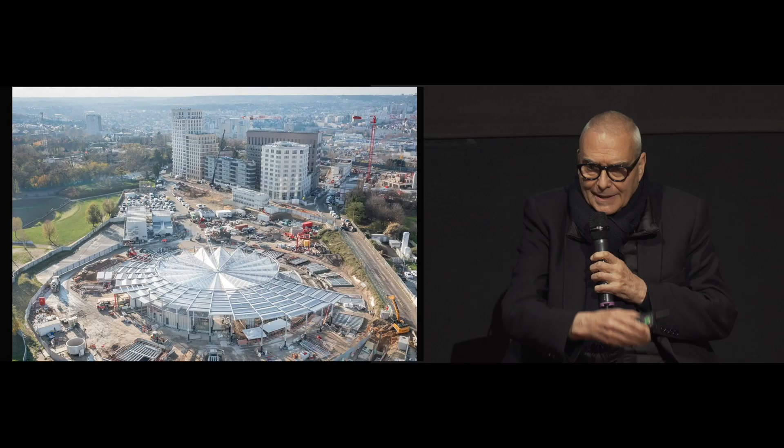And indeed, it will help connect the Gustave Roussy Hospital, which is one of the largest oncology centers in Europe. With this train station, the idea is to extend the city towards the subsurface.

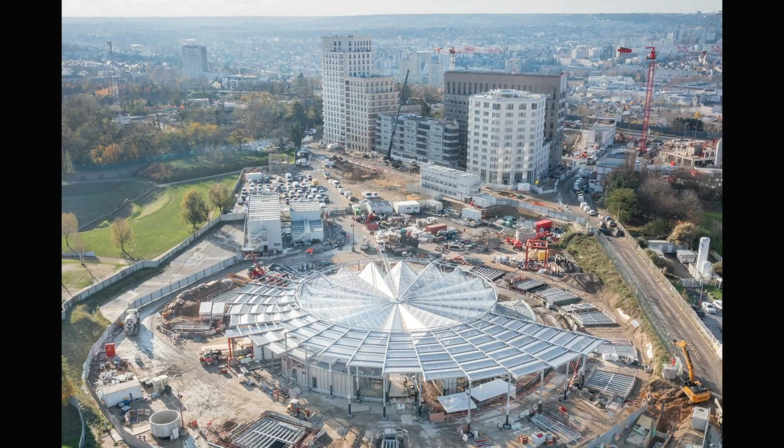We've spoken a lot about subsurface, about underground networks today, and you really want to create that connection between what's happening underground and over the surface. This station is not monumental in its visible part, but more monumental in its underground section.

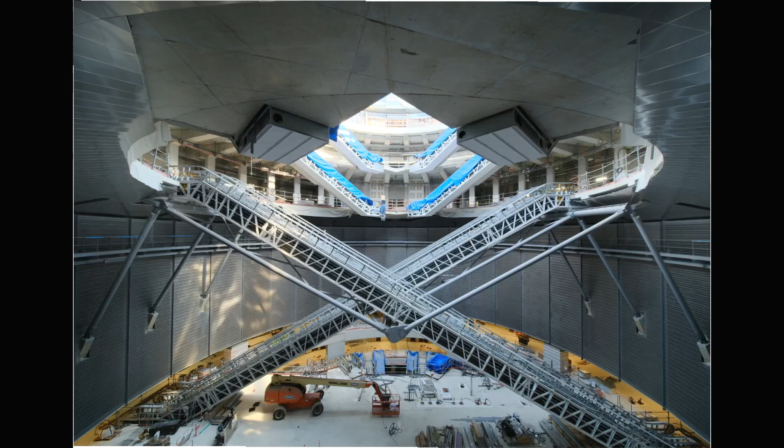Natural light will enter that part that's underground, and when people get off their metro, right above their heads, they'll see natural light shining through. So the idea again is to extend cities underground.

We've spoken about public spaces, and really this is a place which will be for the common good. So the principle is for that train station to start quite far down. With the first two levels, there will be services, stores, and outlets, and the Gustave Roussy Hospital will also be extended underground with a connection to that train station.

This is a very interesting train station. We've spoken about infrastructures in various ways and about architecture as well, with the dimension of infrastructure and engineering — we used it as a language. House of cards, etc. But if we can say, in a very direct relationship, here the idea is to have that direct relationship with the work that was imagined by engineering.

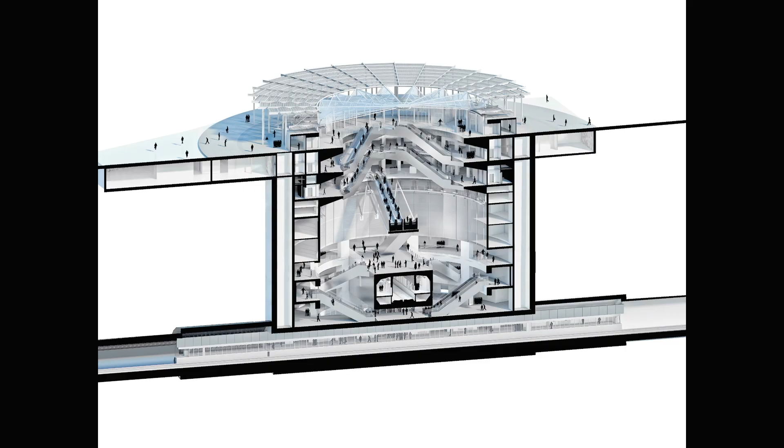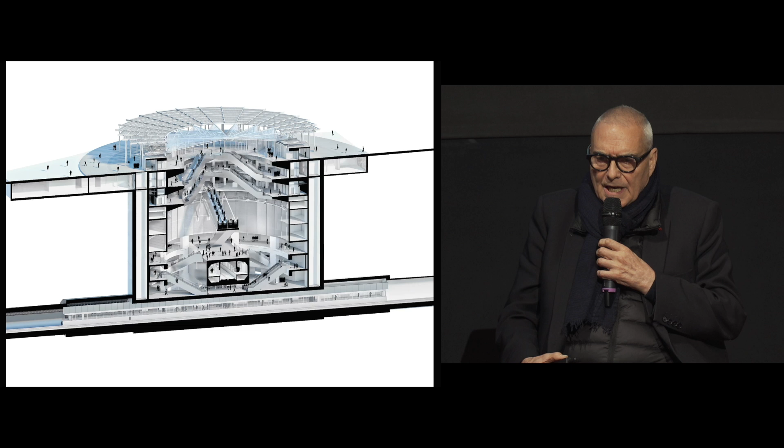My proposal back in the day, when we were applying during interviews, was to develop that cylinder shape. This is a 70-meter diameter station that goes 50 meters down, and with that cylinder shape you do not use quite as much material. The wall separating the train station from its geophysical environment is just a 1 meter thick wall of concrete. So with these dimensions, the train station will be quite open and will not take up quite so much space.

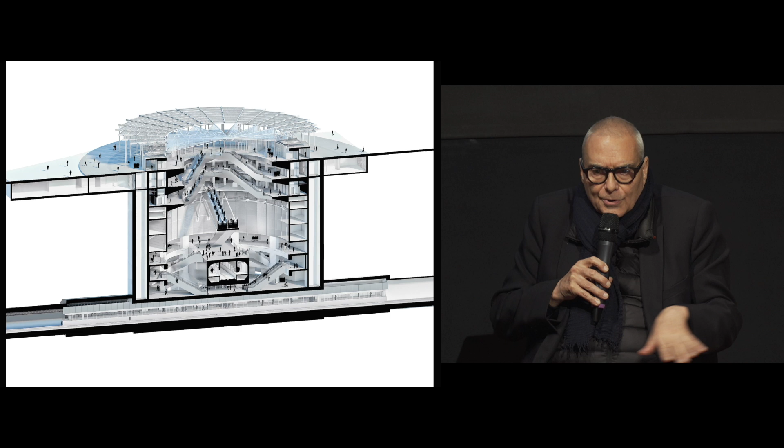And the estimate is that there will be 80,000 passengers going through the station every single day. So this project is an extension of our realization in Napoli with a metro station that was built in front of the train station on the Piazza Garibaldi.

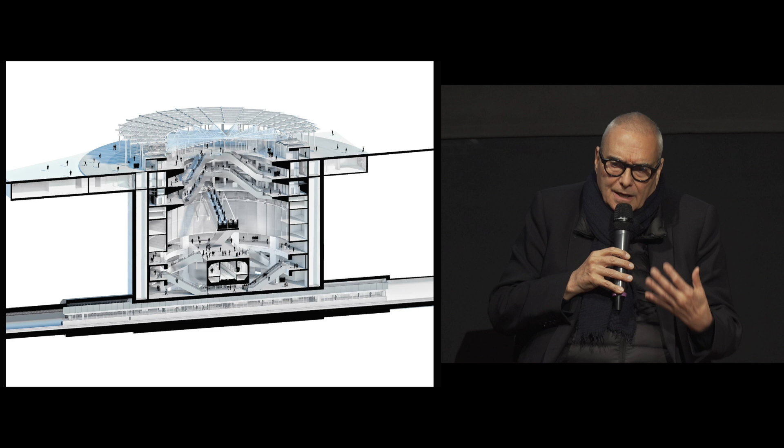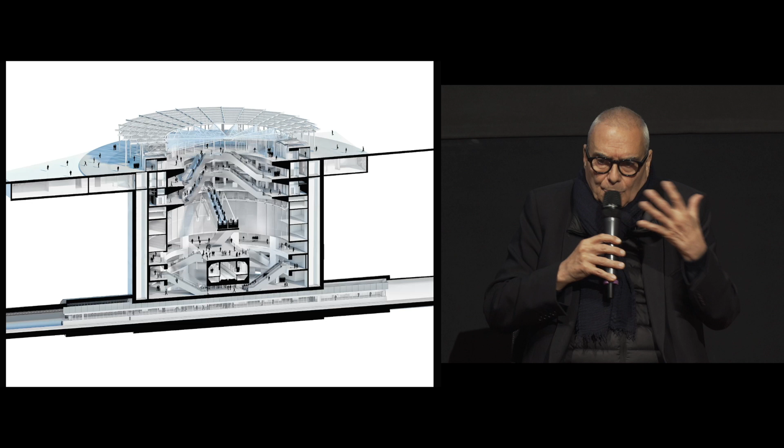Again, the idea was to shed light underground with mechanisms and systems that we implemented in Napoli as well, but in a more Cartesian, scientific way. So here you have a movement that's being staged. We're going underground, no galleries, no tunnels. Light is here with us the whole time. When you get off your metro, you have that natural light shining down on you directly, so you have that natural flow accompanying passengers. The space, the vacuum, is here from a physical standpoint, allowing the air to enter fully in these volumes, and the same applies to light. So there will no longer be any discontinuity between that train station underground and the city above.

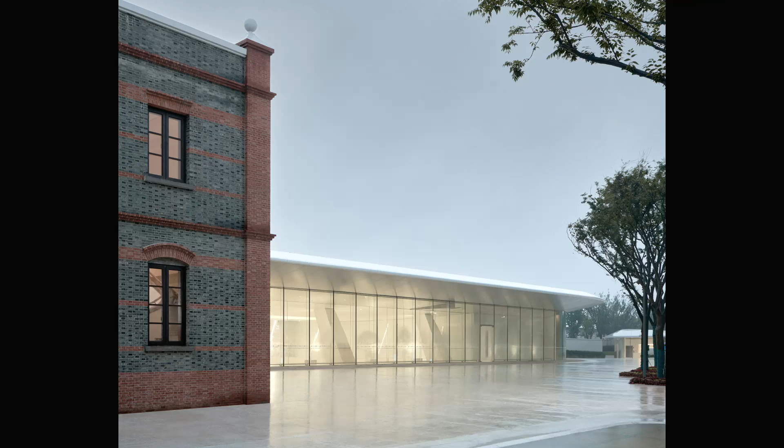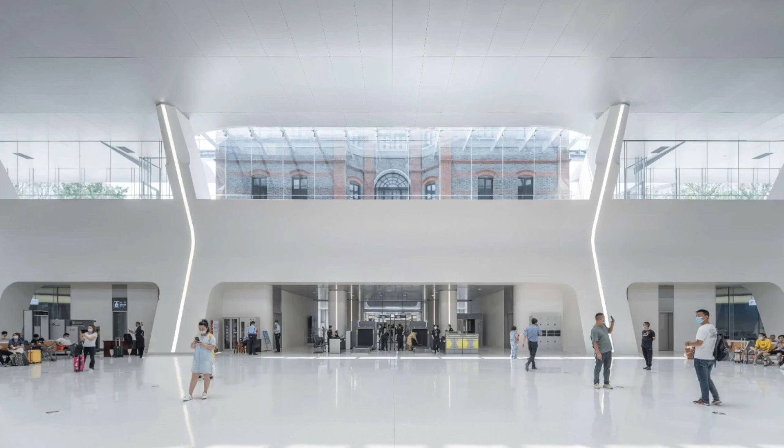That became the excuse: we could make the new train station really low. So we kept the 2-story building, and on 2 sides you see the new building with only 1 floor above ground, with the main function pushed below. We also bring natural light to the underground. We let the public transportation, the parking, everything go underground, so we can keep the ground space open for trees. So that's the space underground with a lot of natural light. You can see the historical building, and there's also a waiting area here.

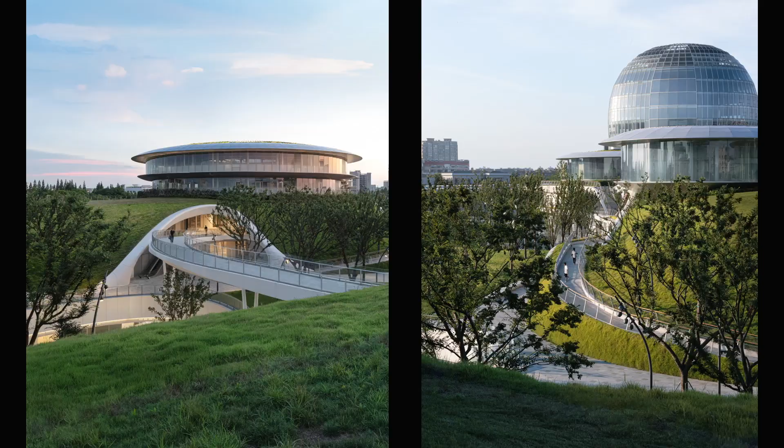Above ground, we introduce a lot of commercial and public functions, but we integrate all this with the park. The idea is that the train station is very functional, but a lot of people come here, and they should go beyond the function—they should find more green space, public space, open space. That was the idea.

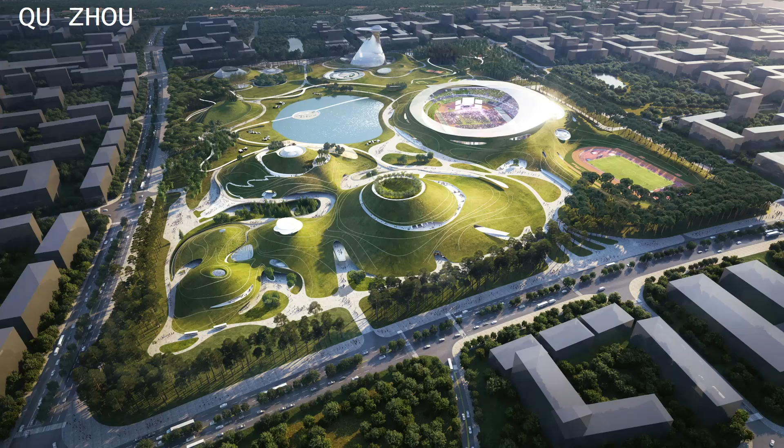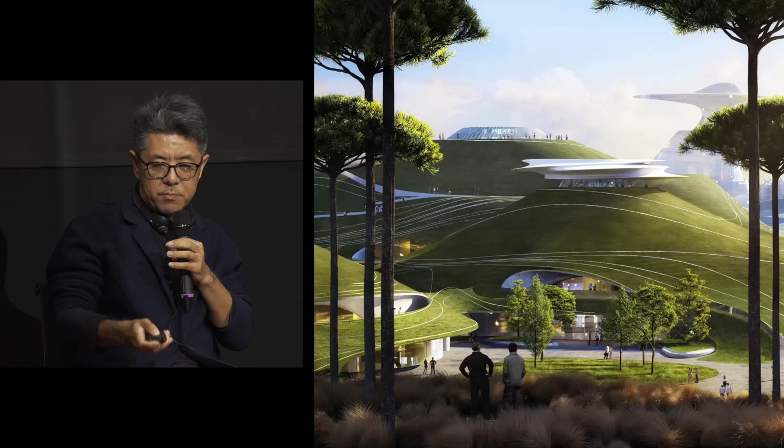This is another train station, but it belongs to a new train station development area, in a city called Quzhou. We were supposed to build several stadiums next to the train station, but here you can see we covered all these train stations and stadiums with green. So the whole area becomes a park, and all this mountain-like structure inside contains the stadiums.

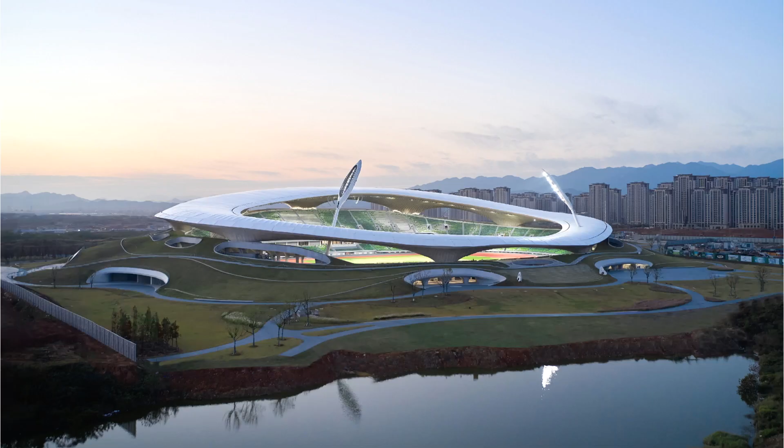They look like volcanoes. It's a big space inside, but outside you can walk around as a park. You can climb those structures—those are artificial mountains, you can just go up there. This is one stadium we've already completed; we're building more, but this one is already finished. It's an open space for sports.

Around it is a public park, but this is next to a train station. So we decided to provide not only the sports function, but also a green park. Here you can see that they're building the train station first, and then building all these cities around, because the transportation can bring a lot of people, and they build residential and commercial around the train station. But here, the stadium becomes the starting point for this new open green space.

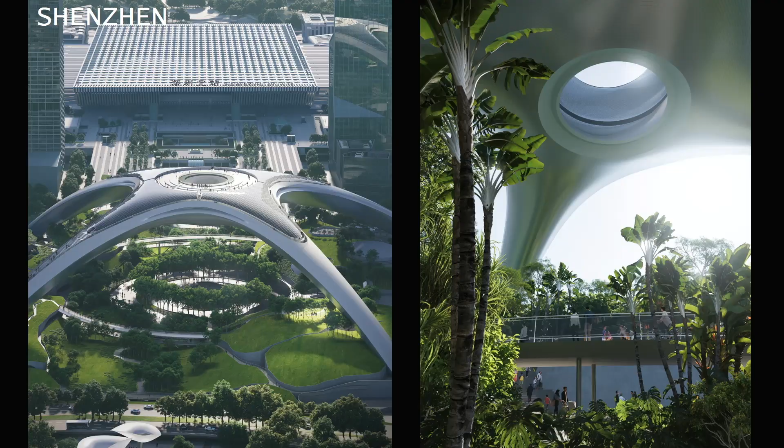We're still designing this, but this is actually in front of a huge train station in Shenzhen. You see that the background is a big station. It's connected to Hong Kong, Shenzhen, and the rest of China.

In front of this there's a space. They want to build more functions, but they didn't exactly know what to do. But here is our proposal: to keep the ground more like an integrated natural function. And then we build this big arch as a space museum. Underneath is a lot of educational function for kids. Actually, they have many towers around.

Every station has towers for office, residential, hotel. But what is lacking here is space for people to stay, and for kids and families to go—because they don't go there, they only go for business. So we figured out how to provide more public space, leisure space, parks, and educational space.

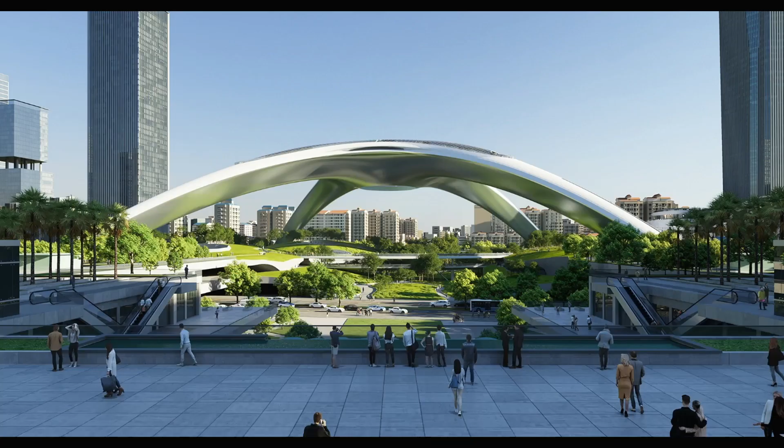So here is one of those kinds of spaces. There's a museum above ground in the sky, and you can go up from the angled lift. Underneath is a green space. Under the green space is the subway, train tracks, everything. That's why the structure has to go to all the corners, because you cannot build anything in the middle.

So we make this almost like a gateway in front of the existing train station. Of course they need a landmark, they need something visual, but more importantly they need something more engaging, more usable as a public attraction. So underneath here you have a park, you have an educational function, and above you can always provide a view deck for everyone to go up.

So I think, from the previous conversation, I really support the idea that functional architecture should also be something beautiful and culturally related, so that everyone can enjoy this journey as part of life.

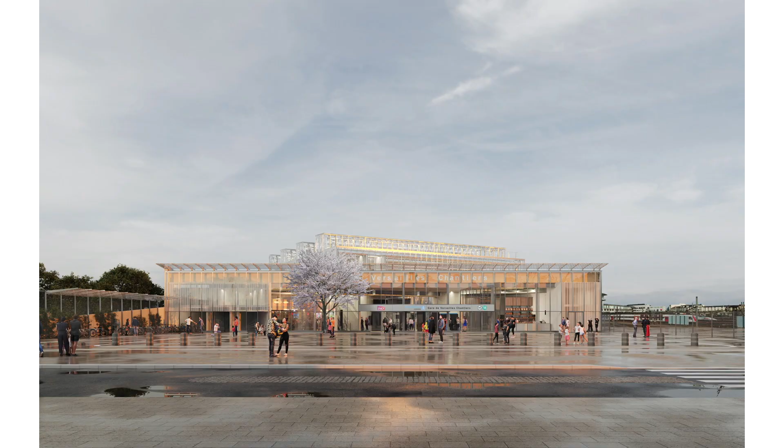Yes, so I'm starting with a very different station here, Versailles Chantiers—so quite a contrast. Here we have an existing station, the Versailles Chantiers station, that already existed, and it was extended with the Grand Paris project, with the metro extension.

We're speaking about infrastructure and architecture in that roundtable, and about the connections between both. Well, these train stations that are underground, that are kind of station boxes, quite inevitable in a way. It's a constraint that you have to make do with, kind of like a machine. And then when you get out...

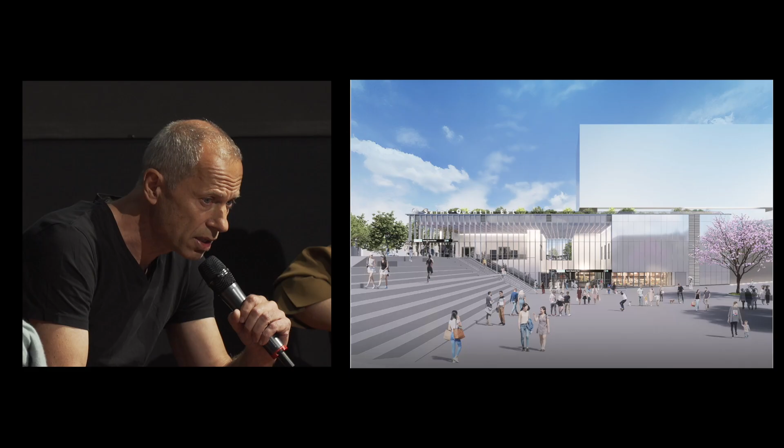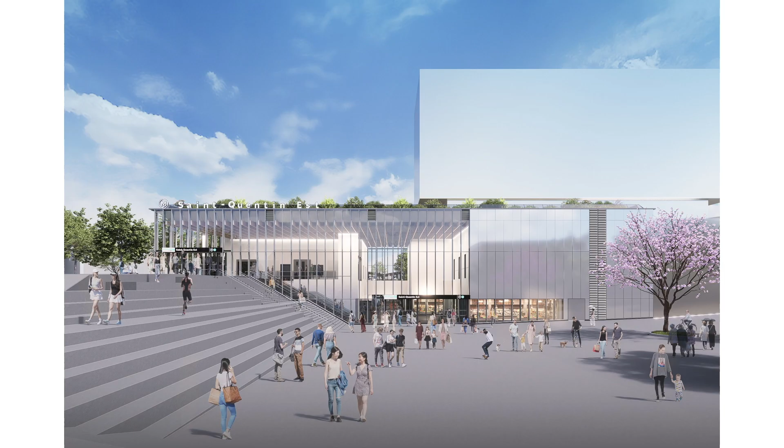When it comes to public spaces, here we're basing ourselves on public space. You have that grand square here, and it's on an intermediate level with the mezzanine, and you have natural light shining through within the station, and you have an underground passage connecting both sides.

Connections are important, and this is a topic which I think is perhaps rather conventional. You've already spoken about the Villepinte station, so I think I'm going to perhaps not focus too much on it. We are in charge of an entire section there, that's 5 kilometers long, above ground.

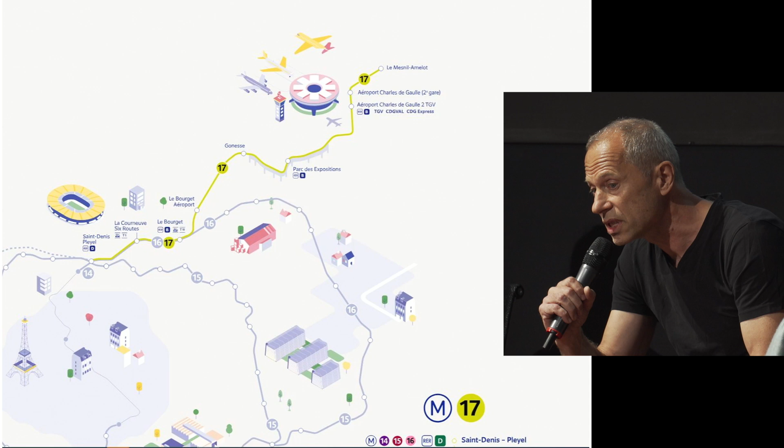As I listened to Aurélie, I thought to myself, well, that's a pity, because there should be indeed more metro lines on the surface. We were so lucky to be able to tell the story of the landscape that we are going through. So it's kind of like a stroll through these existing urban spaces, or urban spaces to be, kind of like a promenade.

You spoke about the Simone de Beauvoir passageway, and here we have a really great example of that, with a connection that was made between the city center areas and other surrounding areas. And with these connections, things can work.

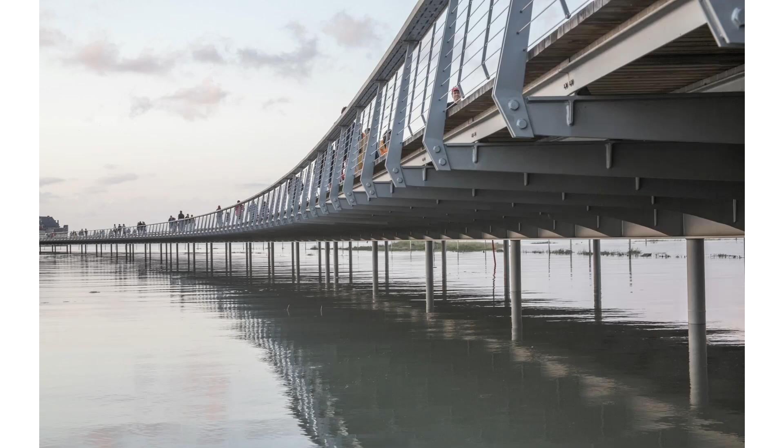Here, that's the access passageway to the Mont Saint-Michel. Why did I want to speak about this project? Well, that's because here you have that intimate connection between the structure and architecture. And what you're seeing here, we planted these poles every 12 meters, which was definitely no easy enterprise with the tides that come and go every 12 hours.

We worked hand in hand with engineering, and with surface metros, that's certainly something that you need to do as well. You really need that connection between engineering and architecture. You really want to work hand in hand. It's really important. Now, very quickly, this is our journey.

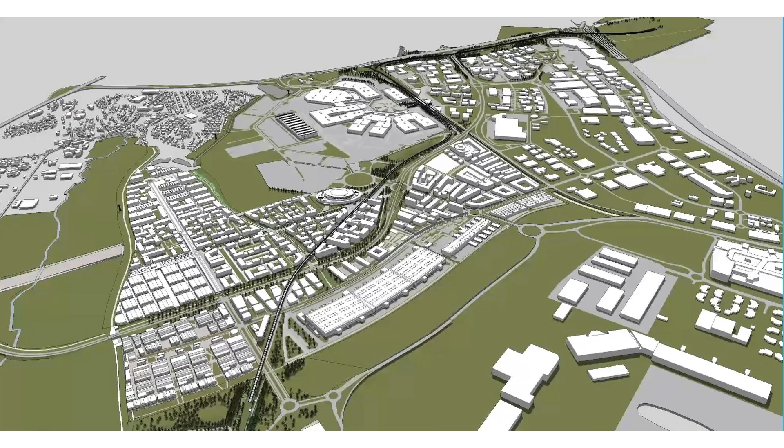Although it could be longer. So here you're going above ground. We also go through the A1 and A3 highway, and further up, we're going through areas which do not quite exist just yet, all the way down to Tremblay. And so here you have the entire journey.

What did we want to do? Well, with our project, with that viaduct, we wanted to insert ourselves with these pillars and poles, but in a very delicate way. We really wanted to be that. We really wanted to connect the dots here, just so that passengers can enjoy the views and the landscapes.

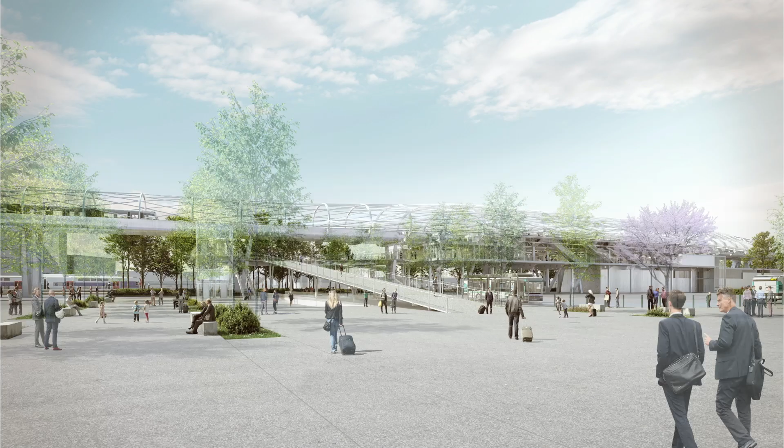For the train station, we didn't have much to do. I mean, it's just about perhaps further sizing up the train station, and then we have that delicate connection with the viaduct that we designed and developed. And then you go on to disappear into the tunnels underground.

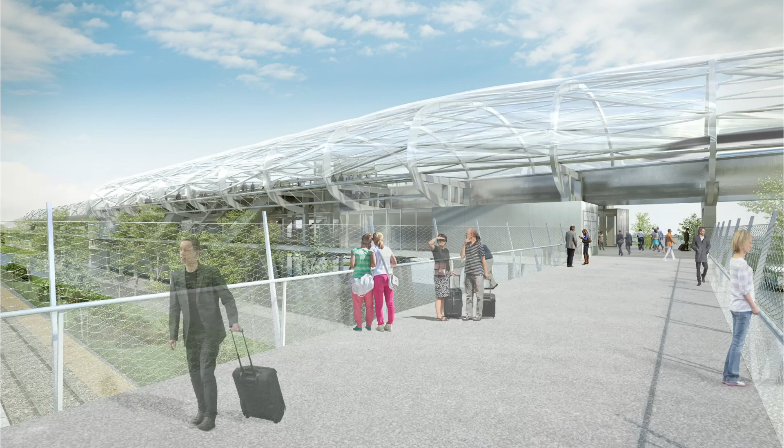This is a train station with many connections, which is also connected to the Parc des Expositions in Villepinte. So you have people going there to attend exhibitions, and then on other days there are no exhibitions at all. These are territories that are under development, really.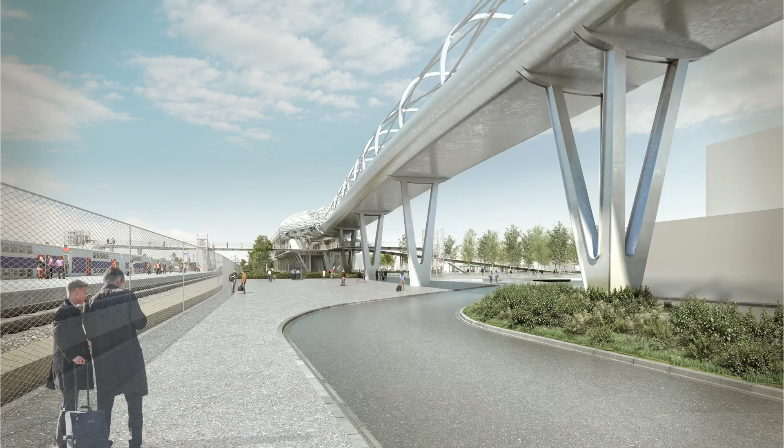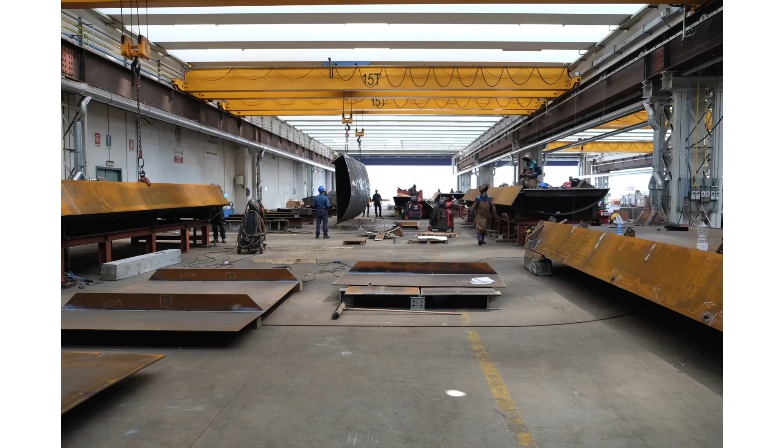And with that train station, we opted for a steel structure. Why? Well, that's because that kind of structure allows us to further draw those various elements, to give a different scale, to give a different understanding. You have these A-shaped, V-shaped pillars and poles supporting the structure.

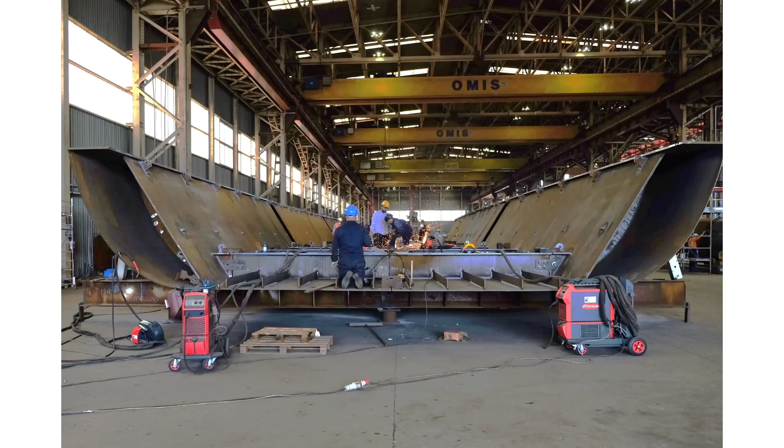Now, this is a picture that was taken very recently near Venice, and this is where we're building the first supporting elements. All right, so that's great.

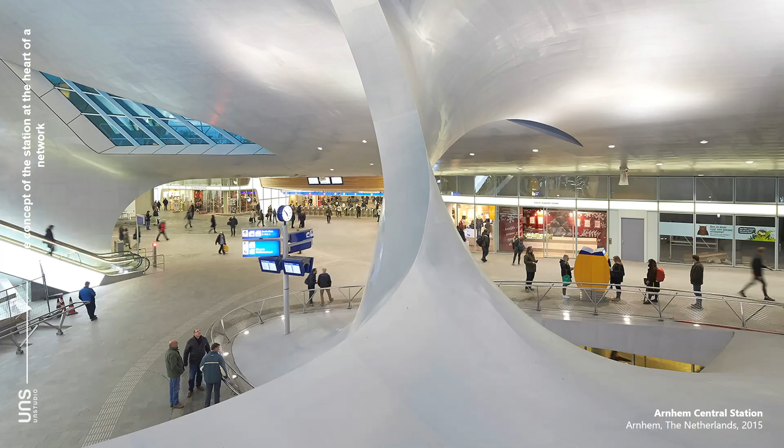Here we have this fundamental structure, which is a mushroom-like structure, and it can have a span of up to 35 meters on either side. Now, why did we think of a mushroom? Well, it's a way of having an open view on all sides, so you can actually feel safe as you're walking through this train station. There's no corridor, there's no dark corner where you aren't visible. No matter where you are, you can see right through to the platforms within the train station.

In addition to the feeling of safety, it provides open access. You can also see that the floor has no stairs on it, so it's nice and easily accessible for all.

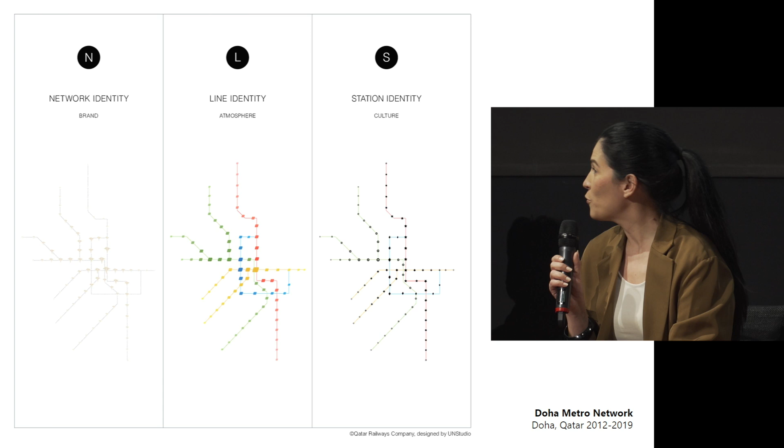And then we take that initial question and take it a next step further. How can we take that impact from just an individual train station and apply it to an entire train network? So with this example, we had the additional challenge of designing and building 37 train stations along 3 different lines in just 7 years.

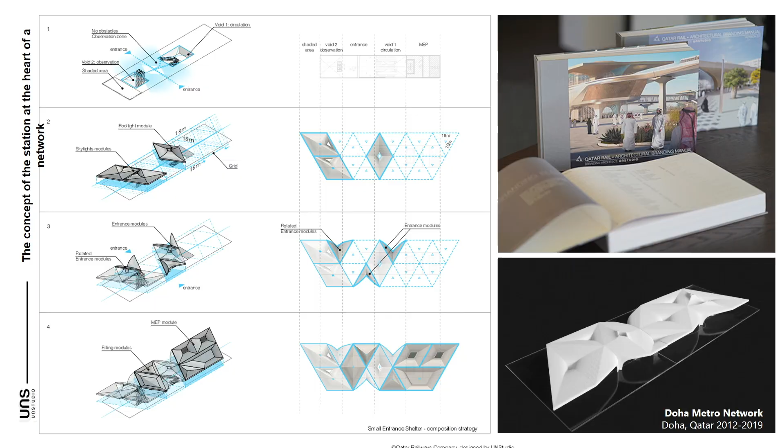So the first thing we had to do was come up with a design that was highly modular. We actually came up with a design handbook, and that handbook covers all of the principles and all of the different parts that could easily be put in by any architects who would be working on the project down the line, on the 37 different stations.

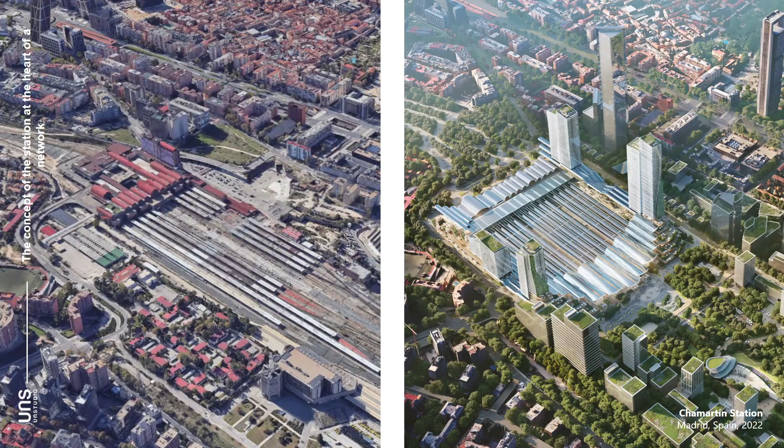It also created a sense of consistency between all of them, but it could be adapted to each individual context, while also ensuring we could keep it at a manageable scale, because we wanted to create public spaces that would change habits and the way people engage with these different sites. Unfortunately, nearly all people in the area didn't really engage with the underground system, a lot of people drove cars, so we had to change habits in that sense.

This is another interesting project in Madrid that we're currently working on. For this, we wanted to carry forward that same idea of well-being and safety. We wanted to focus on physical health, but also one's mental health, because we are starting to really become aware of how important that is, and also social health.

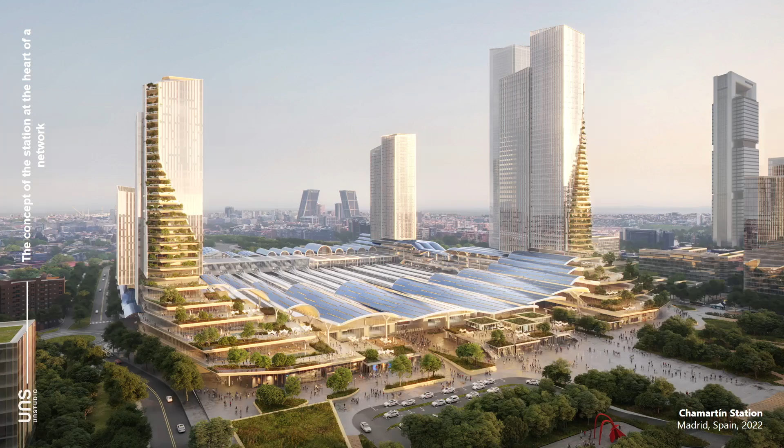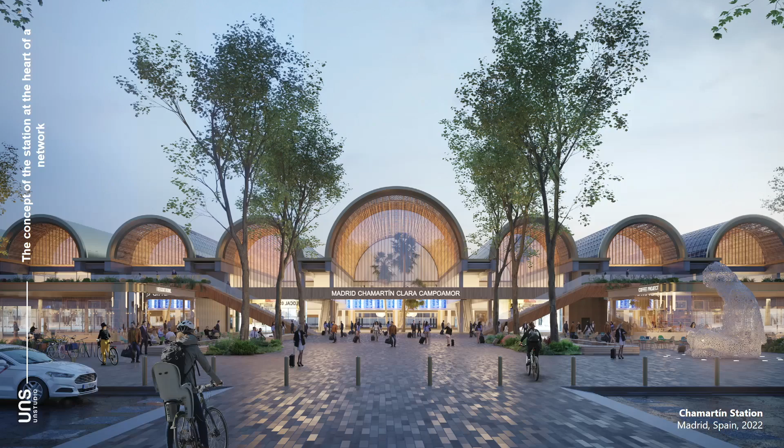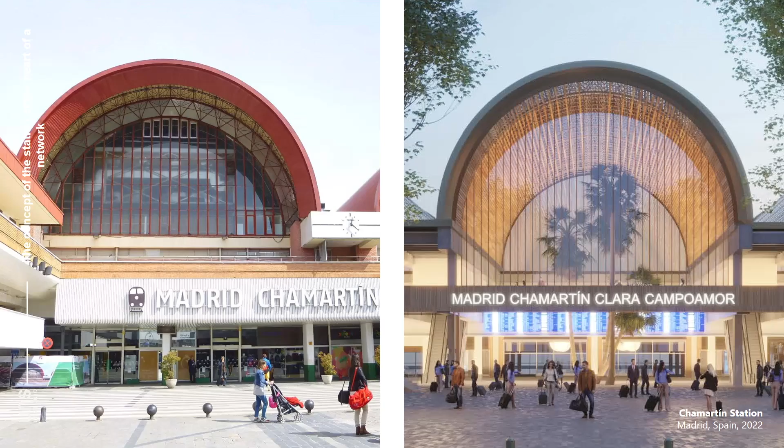Something where again, all 4 sides were open, where you could have inflows and outflows throughout the entire building. The fundamental idea was to have as many people coming in and out of the building as possible. We really wanted to celebrate the beauty of that historical site, because the site was in fact beautiful, or at least try and highlight those parts that were beautiful in the existing site.

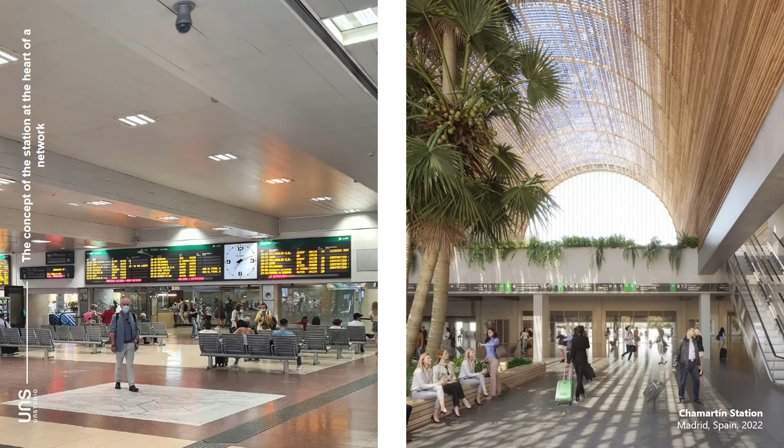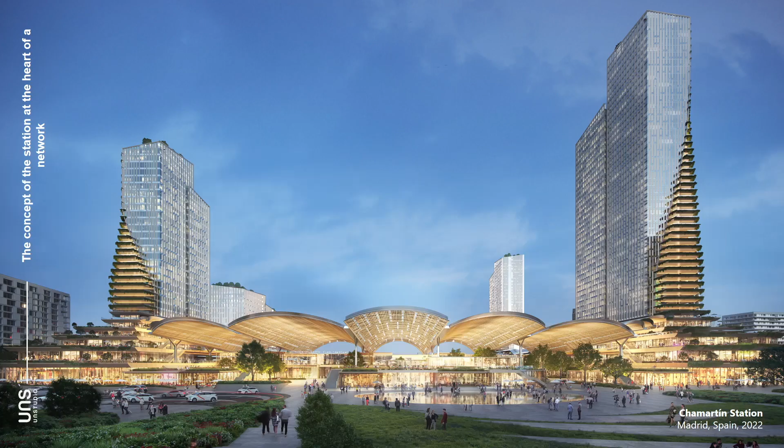So we took those arched ceilings and highlighted them. We really wanted to find ways of creating high ceiling spaces as well, because with those high ceiling spaces you can get in more light, and natural light is a fundamental way of making people feel safe, feel good. Again, well-being being such a fundamental part of the design, having open views, was a way of encouraging people to come into the space and use public transport.

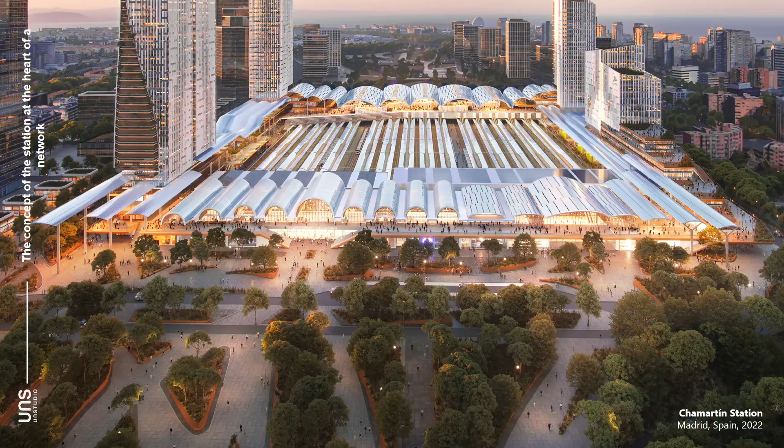Once again, there was some of the building that we kept entirely, other areas where we refurbished them, other areas which were entirely new constructions. But again, in each of those 3 main areas, we tried to keep a sense of consistency across the design, to build upon the pre-existing buildings.

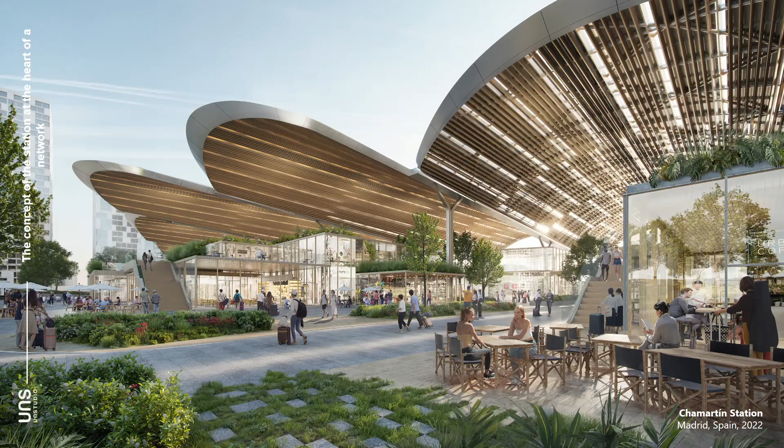Again, here we can see this feeling of movement, but also we created spaces of relaxation where people would want to not just travel through, but also want to stay there to enjoy the space. And as I said, we wanted to keep things at a human scale, at a livable scale.

One thing which is quite extraordinary is that the postcode where we live has more of an impact on our sense of health and well-being than our own DNA. I think it's a fascinating notion. So what that means is that for every station we are building, we have an opportunity to really transform the quality of life of those local residents, to have a positive impact on their sense of health and well-being.

And oftentimes these train stations are in areas which are forgotten or ignored areas of cities. So creating these beautiful spaces is a way of creating a new sense of dynamic, and it's a way of us playing a greater purpose.

Something I also want to talk about, because it really pulls together all of the examples I've just spoken of, is a project we've been working on, the Austin Transit project. It really takes this notion of transit-oriented development, TOD, which is a fantastic principle. It's got plenty of merit behind it, but we want to take that and elevate it.

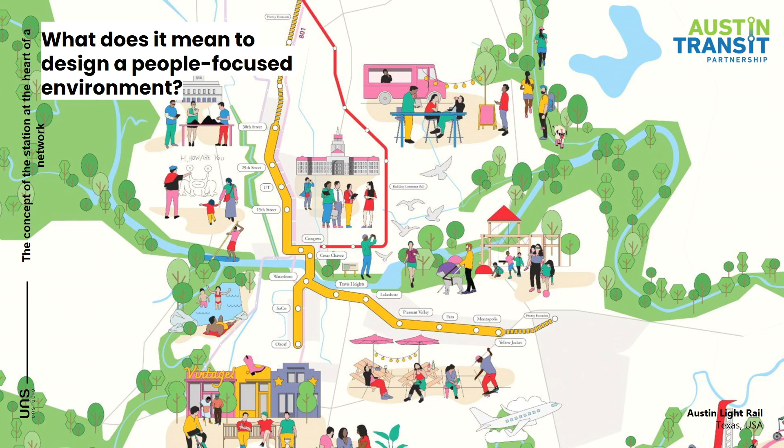We want to take that concept and take it to people-oriented development, where we're focusing not just on transit, but the people who use transit systems.

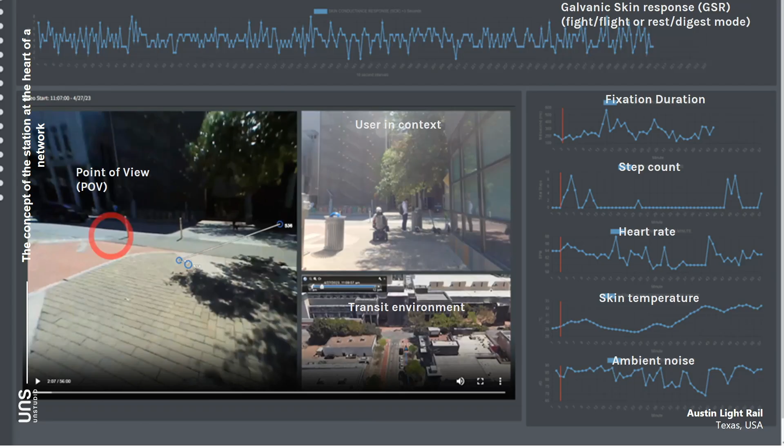So what that means is that we use techniques often found in cognitive science and behavioral science to understand, study, analyze and evaluate the way people use space, what they feel, what sort of stress they feel. And we want to try and understand why they feel that. Do they feel fear? If so, why?

Who uses which spaces as opposed to others? Are there types of people? I don't want to go into too much detail here, but it's a very interesting way of trying to understand the way people experience these spaces, to learn from them, and then to try and leverage that as we design future spaces.

We also use really high-tech systems here to analyze all of that. And with that, we can really monitor exactly what people see when they enter a specific space. So what do they look at? What do they feel? Because we measure their stress or level of relaxation.

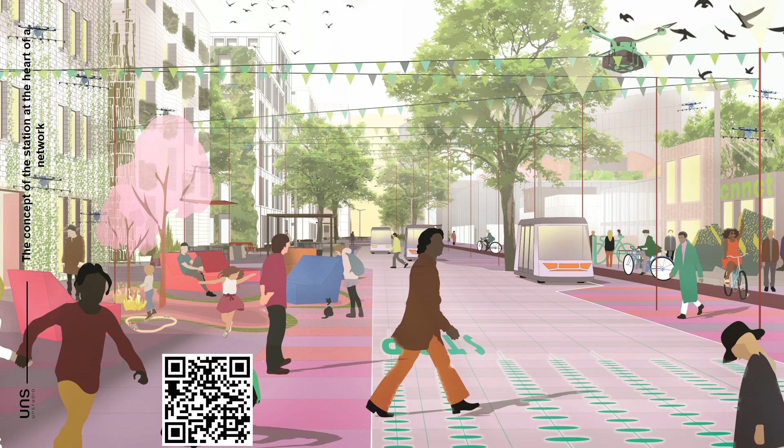And that feeds into this, where we can come up with design spaces that are sustainable cities, sustainable neighborhoods, or it could be the area around a train station, which is designed around people. And it is really spaces that are for all.